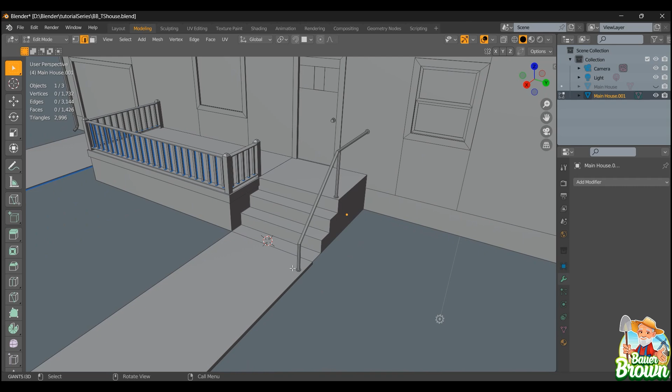Since the last video, I added a few things. I added these little flanges, you can call them, on the bottom of the railing. I put those there, this one and this one. This one was already there. I added an additional gutter in the back here, and a rain spout. So that's been added, and that is about it.

Let me see here. Did I do it or not? I did. On the tops and bottoms of these posts here, on every one of these posts, there's a face. There's a visible face.

So what I did is I went through here and I grabbed the tops of these, each one of these tops like that, and I deleted the faces. Now, the reason that I do that, it's not such a big deal. I mean, it can't be seen, first of all, but that's most of the reason that I did it. One, it can't be seen, so why do you want to put a texture on something that you can't see to begin with?

And the second issue that it may cause is there's a lot of them, right? So with all of these additional faces that you have here, and there's a lot, when you add them all up, there's a bunch. That all gets put into your UV map. So when we look at our UV map over here, which is looking kind of crazy, all those little squares there are going to show up. They're going to take space, basically.

They're going to take up space in our UV map, which we don't want to do. We want to keep that down to a minimum. The less objects that we have to put into our map, into our UV space, the better off we're going to be. So why bother taking up all that extra room? It does add up. All those little pieces add up to a chunk of space that could be used for something that's actually visible.

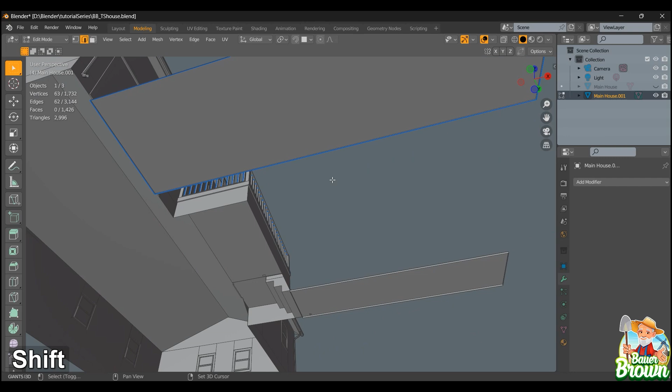And this is what I was explaining to you one other time about the underside of the roof. When you look at the bottom side of this roof, if you did it differently, you see with mine, when I go into face select here, just the visible part has two sides to the roof. We have the top and then we have this part here. Now the underside, that's not actually visible. This is just the back half, right, so you can see it's all in red.

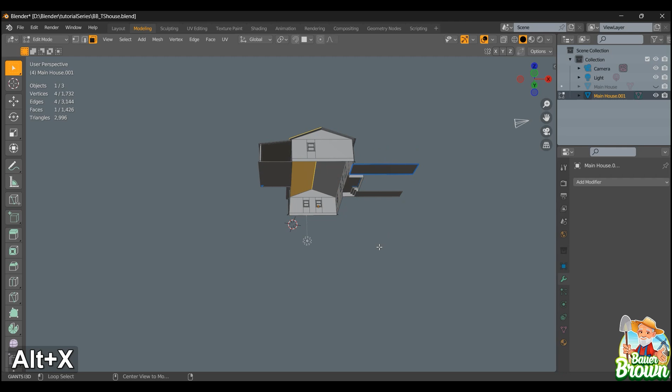So now, like I was saying, if you did yours not incorrectly, but if you did it in such a way that the bottom of your roof also has a face, all of this extra room is going to be taken up inside of your UV map, which you don't want. It's just extra space, wasted space.

And think about it this way. If I had built a huge mansion, and there's just lots and lots of parts to it, all of those parts end up in my UV map. Now this UV map for this is only going to be a 2048 by 2048. That's my ultimate final texture size, a 2K 2048.

Now, if this was a huge mansion with tons of pieces, squeezing them down into a 2048 may be doable. But if I have too much going on inside of there, it's going to make my final texture result look really bad. So in that case, I'd probably just use a bigger texture, like a 4K 4096. But for this house, it's going to be a 2K 2048.

The less objects I have inside of this UV space, the better off my texture is going to look. So if this roof, for example, covers a pretty large area, that's going to be a pretty detailed roof. It won't look bad. But if I squeeze it down so it's only as big as you see here, it may not look as good. It starts to lose a little bit of resolution, that crispness that makes it look like a crisp, clear image. It starts to get a little fuzzy and the resolution doesn't look so great.

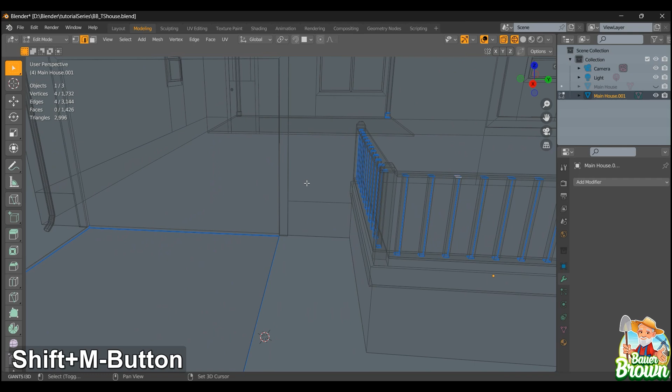Now you don't have to go crazy and delete absolutely every single thing that's not visible. If it's only just a piece here and there, no big deal, as long as it's a small piece. So I'll do the bottoms of these doorways, the bottom of the trim, any one of these bigger posts - I'll delete the bottoms of those. These little railing posts, I'll delete the tops and the bottoms. Probably the same thing for the garage door - I think I'll do the bottoms down in here. I'll delete those.

And I'll just go around and pick the obvious ones. Don't get crazy, don't go buck nutty on this thing deleting every single little thing that's hidden - just the obvious ones, things that are clearly going to take up extra space on your UV map more than you wanted. Go ahead and delete them. So that's one of the things I did while we were gone.

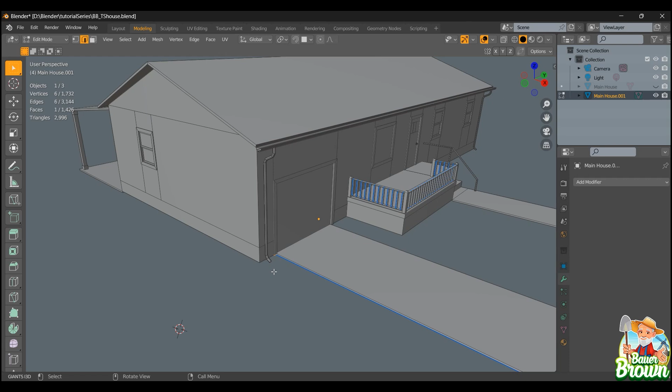Now, the next step - we're going to be kind of skipping a step here. I should have done it already, but this video is about my workflow for this Deco house, and normally it's 50-50. I'm pretty bad at this, but what I'll do is my occluder mesh, right? That should have been done by now, at the very early stages of this house.

The reason I skipped it is because I use a separate program. The same people that make Instamat also make a program called InstaLOD, which also does your occluder meshes, and it does a really, really good job of it. For me personally, it's been hit and miss - sometimes it's outstanding, sometimes not so much - but it's not the program's fault. The program does exactly what it should be doing. It's me that doesn't really know how to work the program that well. I'm fairly new to it, so I'm still navigating the waters a bit and getting used to how things work, but I do like to try to give it a shot.

Now, the fact that I missed making the occluder mesh to this point isn't a big deal, because the occluder mesh is nothing but bringing in a new object.

You would just bring in a normal square or cube and stretch it out to the basic size of the house, make it a tiny bit smaller so it fits inside just the shape. You don't want any of the extra stuff. You don't need the driveway, you don't need the porch. Well, maybe part of the porch, like the bigger base, if you wanted to, but again it's completely not necessary. Just what you see on the house here.

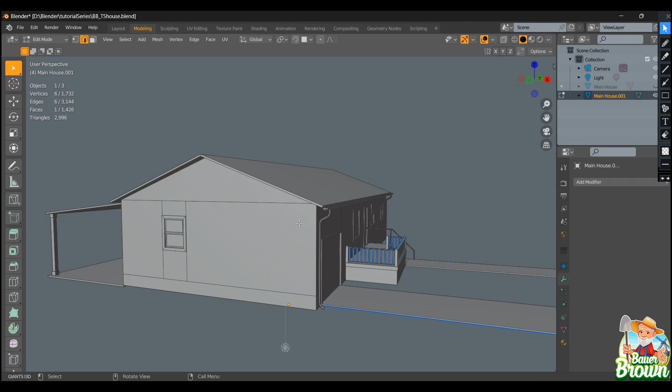And at that point I would just duplicate it, make a copy of it. I call that my occluder mesh. And then that's it, I would just move on to continuing the work with the house. But like I said, I didn't do that step. One, I guess I sort of forgot, and two, I forgot because I'm so used to using another program, but that's fine.

So if when I get to that point where I get to the program, if it doesn't do exactly what I want it to do, I'll show you how to go back and make the occluder mesh for this house. Not a big deal, not missing much, right? It's very, very simple.

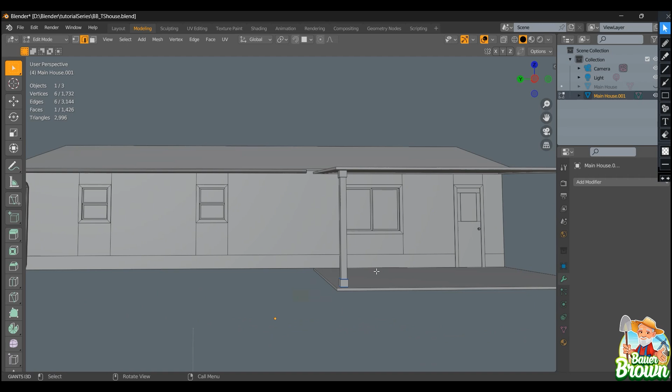Okay, so with that aside, the very next step I would do from here is cleaning up my mesh. Now this mesh here is already, one, pretty clean to begin with, and two, I have done some work on it. Like I said, this is the third time I'm shooting this video, so there's been some work done. And once it's saved, it's saved, I can't go back and put that work back into it.

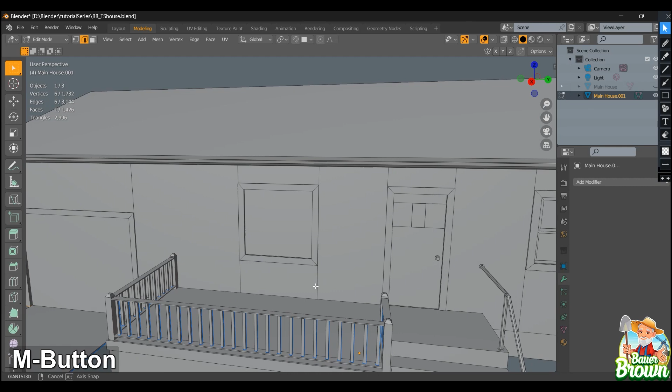All right, so I'm going to try to walk you through this. I guess I could use a different mesh, a different project as an example, but this is so cut and dry and fairly easy that I'm pretty sure you guys are going to grasp the concept either way.

So what I mean about cleaning up the mesh is getting rid of any extra faces, vertices, and edges that are either adding to the geometry or aren't necessary. When you start putting in loop cuts and stuff like that, you end up with a lot of additional lines or edges that just aren't needed, so you can go ahead and start getting rid of them. Now you've got to be careful.

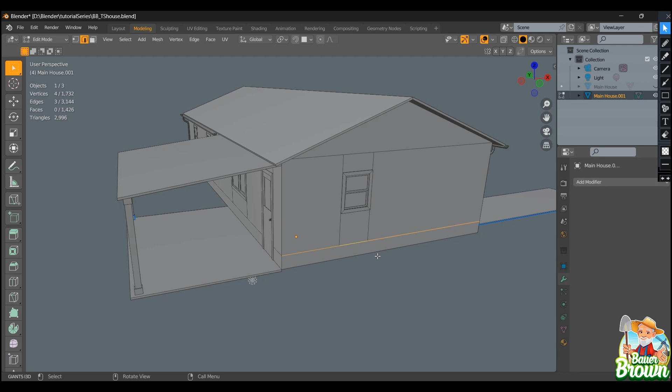Like when you get down here to the bottom, I've already deleted some lines, or edges. You have to give some forethought to what textures are going where, and how you're going to go about unwrapping this house, which is the next step after this. There's going to be a foundation that goes down here, so my texture is going to be like a concrete type texture. So I want to make sure I don't delete this edge because it's needed.

But other edges, like around the windows, if you have extra ones that shoot horizontally, maybe from the bottom of the window out to the edge of the house, that can go. It's just a matter of highlighting it, right click, D for dissolve, and then there you go. Now, with this, you can see it was okay.

It didn't disturb anything, right? So the window looks okay. It's all intact. The house is intact. So why not do that?

Well, the reason you don't want to do that is because you still want to keep your basic polygon, right? So either your tris, which is a triangle with 3 sides, or your quads, which is what you see here, just a regular square with 4 sides. But what I ended up with when I deleted this was an n-gon, right? So that would be something with more than 4 sides.

And what'll happen there is it may have some problems triangulating. Not the end of the world, but you really want to avoid it if at all possible. It may be a problem, may not be. And that problem really isn't going to show itself until you get to the point where you're texturing, right? So when you start texturing, that's when you're going to find out if this caused a problem or not. And it's a pain in the butt, right? You really don't want to have to fix this. Not horrible. It is fixable, but avoid it at all costs.

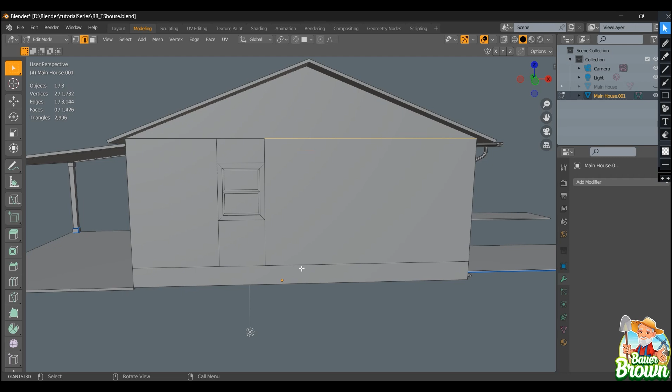Now, to give you an example of this, right? So if I go into face select, if you look at the bottom of my foundation right here, at the very bottom, I want you to focus on this area here. My foundation. If you look at the dot, there's a dot right here. Okay, well, that dot is my normal.

Now, I'm not an expert on this, but I believe when it triangulates and it figures out the area for your texture, it'll do something like this. It'll start at the normal, so it goes from like the corner to the normal, maybe over to this corner. Now, like I said, I'm not an expert, so I might be completely wrong, but I'm pretty sure it has something to do with this.

Well, with this normal being too high up, it's much higher than it should be. So that normal should be, it's not much higher, but it should be sitting a little bit lower. It should be sitting right about this area.

Now, the reason this happened is because I deleted additional edges that I didn't need. So I had some vertical edges. Let me go into my knife tool here. We'll stay in face select. So I had some additional vertical edges in here.

Now, when I add that edge, now you can see look at these two normals compared to each other, right? So this one here is right smack dab in the middle where it belongs, which makes triangulation very easy, much easier than this one. If I was going to have a problem with either one of these, it's going to be this one here, okay? And that's part of how it's fixed.

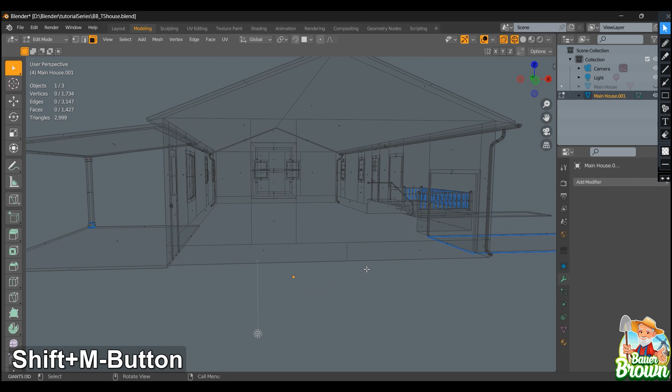When you get into Substance Painter and things aren't quite going the way you want them to with the textures, and what'll happen is it won't apply a texture, it'll look white. I'll show you. It happens frequently. I don't know if it's something I'm doing wrong or anyhow.

What I'll do to fix it is I will add these extra edges in here. Like you can see what I'm doing here is just going vertically, sticking an edge in there. Okay, so now this one here looks good. This one here looks good. In the middle is still a little bit but it may or may not give you an issue.

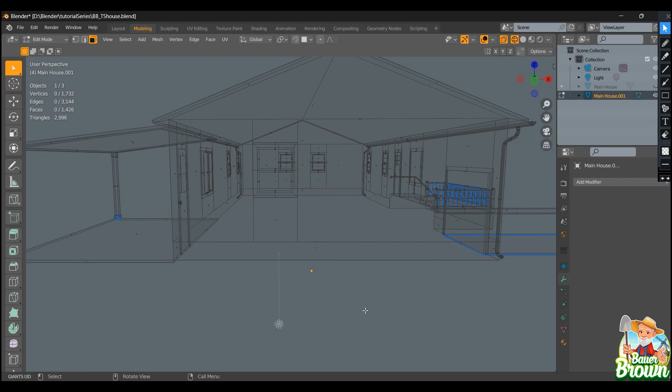So point being there is as you're deleting extra edges, just be mindful of that. Now you don't have to be scared to delete certain things because you may end up with a problem. It still looks nice. I still have a nice quad down there that I can work with. And generally it goes okay, right? It's hit and miss when it actually causes a real problem for me. And it's like I said, it's not the end of the world. It can be fixed. I don't want to say simply enough, but it's not difficult, right?

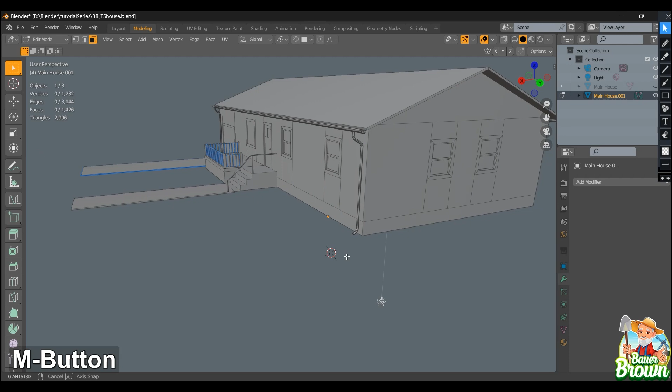Just be mindful of the edges that you delete, because if you get a little too crazy with it, you can throw off the overall position of your normal. Now, I know you can recalculate normals, but I don't think it calculates it back into the center of the face itself. Maybe you can, but I'm not sure how that's done. I've looked into it and didn't find an answer, so I'm not quite sure that's something that can be done, but maybe.

So like I said, that's what I'm doing here - going through any stray lines, which are usually just leftover loop cuts, and getting rid of those edges.

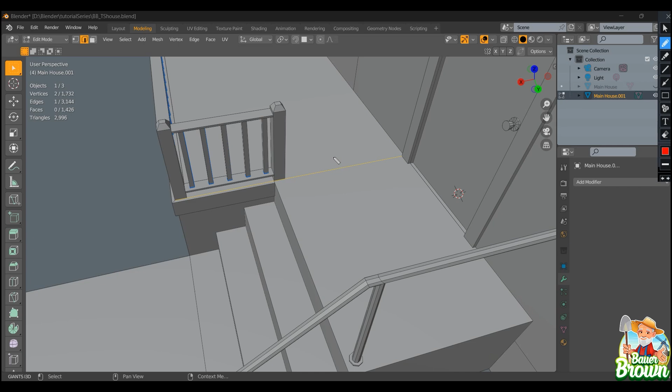Even on this porch, I would leave this edge here because it's an edge for the top of this board runner thing, and it's also the corner of the porch. But if it was just a single line - meaning a line that stopped right here, only about that long - I would probably still leave it, because if I deleted it, it would create an n-gon. I'd have 1, 2, 3, 4, 5 - 6 sides to this polygon now, and you don't want to do that. You want to try, when at all possible, to keep everything as tris and quads.

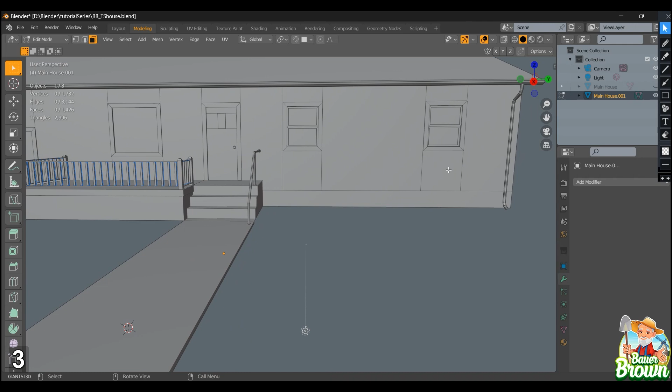That's why my windows look the way they do. I got rid of all my horizontal lines and left these 4-sided polys here. I left these quads in place because they're easy to texture, they're not going to cause a lot of problems, and it's adding very little extra geometry.

So like I said, the name of the game here is to keep your geometry as low as you can. Now does it matter? I get this question a lot - between vertices, edges, faces, triangles, which one matters, which one do I look at? Well, they're all basically adding up to the same thing. If you think about it, an edge is created between 2 vertices - when you connect 2 vertices, then you have an edge.

When you take 3 to 4 vertices and connect those, then you have a face. Same thing with a triangle - 3 vertices is a triangle. So it all comes down to your vertices. Ultimately that's the number I look at - the vertice count. Some people look at the triangles. Ultimately there's not a huge difference - just pick one of these numbers and stick with it. Just make that number go as low as you can and you'll be in good shape.

I look at vertices. I'm going to keep that count down as low as I can - depending on your model, it can get a bit up on the higher side. It's not a huge problem unless you're really high, like when you start getting into the 100,000s, or even something like this house - if this house hit, let's say, 10,000 vertices, maybe 10,000 isn't horrible, but any higher than that I'd be thinking I got a little too much into this house. And 10,000 for me is still pretty high.

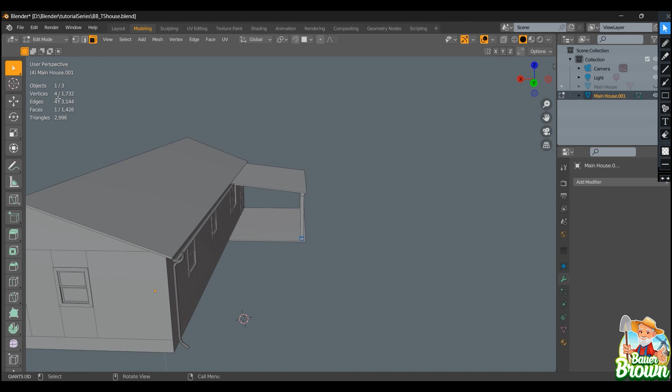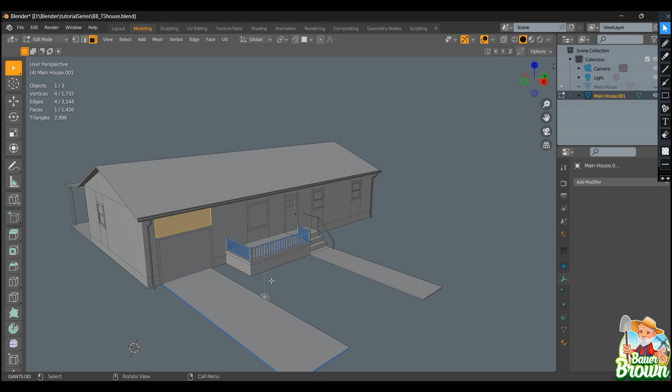As you can see, I'm pretty much done, and I'm only at 1,700 vertices. But I have done projects where the vertice count has gotten up pretty high. You can go look at some of the models currently in Giants Editor - the base game models - and see what their counts look like. They're much higher than anything I'm putting into the game, so you can relax a little bit when your poly count gets a bit higher. But like I said, you do want to keep it on the low side.

So like I said, go through any extra faces - the bottoms of your porches, the bottoms of your posts, the bottoms of your roofs - anything that needs to be deleted that you don't want to show up inside of your UV space. You want to go ahead and delete that.

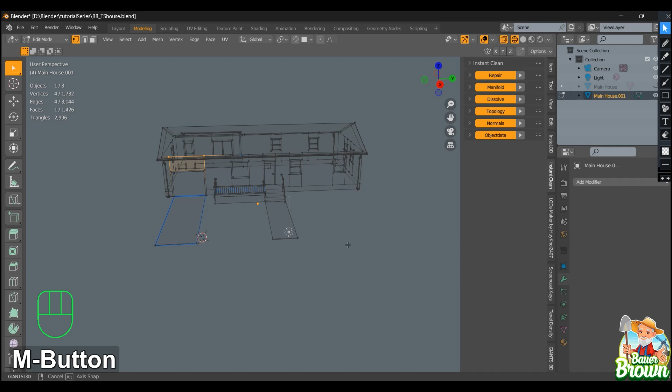Now, one of the things it does that you can do on your own without spending a whole ton of time, and I recommend you do this for every one of your projects, is go into your vertices select. It doesn't matter if you're in X-ray mode or just in solid mode, but what you want to do is hit A for all, select all of them.

And then you want to hit M for merge, and then B for by distance—merge by distance. Down at the bottom it'll tell you how many vertices were removed. Now, I've already cleaned this mesh, so it only removed one vertice. But in your case, it can remove several hundred depending on what you have going on.

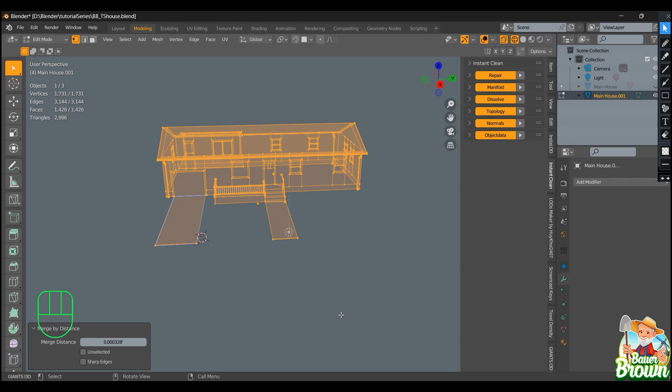So if for some reason you have a lot of doubles, I get them too, lots of doubles, so don't think it's necessarily something you're doing wrong. Maybe it's something you could be doing differently. But as your skills progress, you'll do it less and less. My meshes now, compared to when I started out, are much, much cleaner.

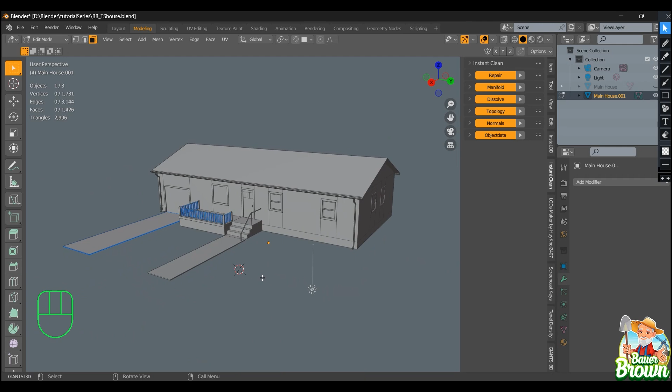They were a mess, man. When I first got into Blender, I'm like, holy hell, this thing is just horrible. So they have gotten better, but that's one thing you can do that's going to make a difference, right?

It'll get rid of a lot of those double vertices, double edges, double faces that you can't see with the naked eye. You didn't know it was there, and there's a lot of them—a lot that I don't know exist, and I don't know where to look for them because I don't know they're there. So that's a huge help all in itself.

So like I said, highlight all of your vertices, go into vertices select, A for select all, and then merge by distance. That'll help you out a lot when it comes to cleaning your mesh.

Okay, so the add-on I use—this is going to be completely up to you whether or not you want to use an add-on. This one is not free. Some of them are not, but this one can be found over on Blender Market.

So it can be found on Blender Market. If you go over to Blender Market and just type in Instant Clean in the search box, it'll bring up something that looks like this. It goes for $9.99, about $10, and it has a video demo. I'm not really going to get into it, but they do have other products as well.

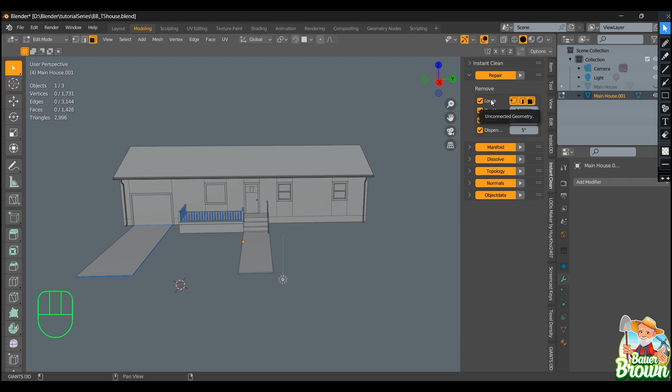Instant Clean, Section Box, stuff like that. But anyhow, long story short, it basically cleans your mesh for you. Now I'll walk you through it quickly, but I don't want to spend too much time on what Instant Clean does. You can drop down each one of these little arrows here, hover over it, and it'll tell you what it's fixing and what it's not fixing—unconnected geometry, doubles, zero faces, and on and on.

Now, the one thing to keep in mind, if you look over here on my scene collection, you see I have main house and then main house.001. I have a copy, and right now I'm currently working on the copy. The main reason I have this copy is for Instant Clean. So before you get all crazy with this program or add-on, make a copy of your house.

Because the very first thing that I did when I got it, I just hit repair. So if I have my object selected, like main house here, I hit repair. Well, nothing came up in this, but generally it will. There'll be a lot of stuff that comes up. And immediately you see these big numbers and you're like, wow, this is great, it's doing such a good job.

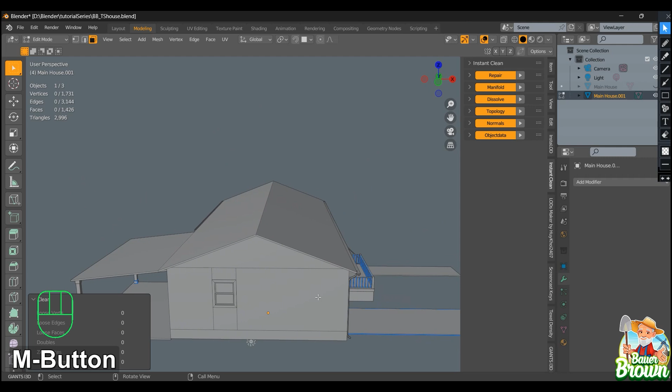And then you'll move down to manifold, dissolve, and you'll keep going and going. You're like, wow, look at all the stuff it took out, this is just an amazing program. And you save it. Maybe a little while later, you come back and realize it took out things you didn't want it to take out. Now your mesh needs to be fixed, first of all, and a lot of times it's maybe not fixable. Maybe there's things it took out that you don't have any clue how to try and fix, and it just made things miserable for you.

So always, before you get into Instant Clean, make a copy of your mesh. This way, if you totally screw the pooch, you can always come back and pick up on the copy that you didn't goof up. So make a copy of it.

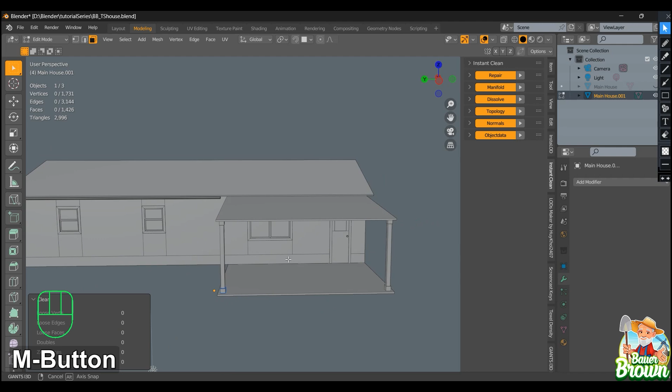And then the second reason that copy is there is for demonstration purposes, because it's the third time I'm shooting this video. It might be the fourth. For some reason I think I shot it three times already, and this is number four. Like I said, I had some issues - one, I had microphone issues. It's been a mess, right? But that's okay, I'm going to make the best out of what I have here.

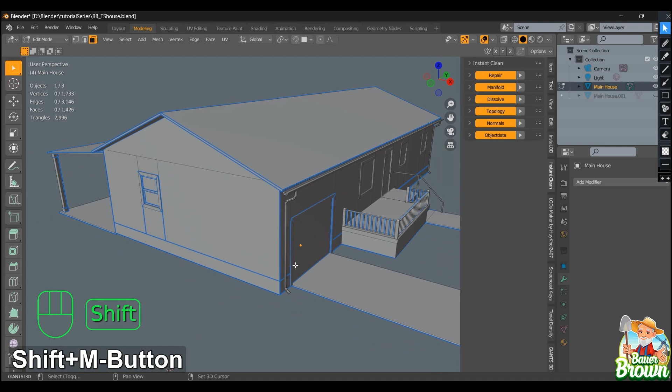So I have a copy that I can use to show you a few things, because my other copy here, you can see there's just a bit more unwrapped on it. And that's what I'm going to show you next, on one that doesn't have as much unwrapping done to it.

So go through Instant Clean, drag down each one of these boxes. Usually repair is pretty good. You can check and uncheck these if you don't want it to do something. So repair in itself is pretty good, you can use that one.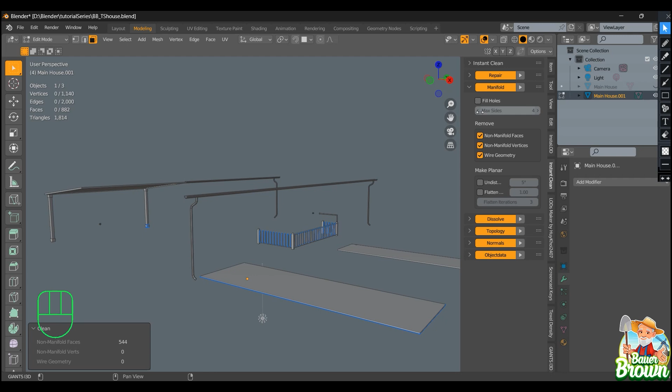Manifold, you want to be careful of. You can see in here, I have non-manifold faces checked, and there's a reason for that. If I go ahead and say okay, clean manifold, well, you can see what it did - that's not good. The reason it did it is because I have the bottom of the house deleted, so that made this whole entire thing here a non-manifold face.

You just want to be careful, because there's a lot of things it will delete that you didn't notice, and you're like, damn it, I didn't notice. I've had it completely delete things like windows or driveways or a porch, and I didn't even notice - a big object that I should have been aware of. So just be very careful of that one. Maybe it's the way I'm modeling, but I generally end up with a good handful of non-manifold faces, so I'll take that out of the selection and then run it.

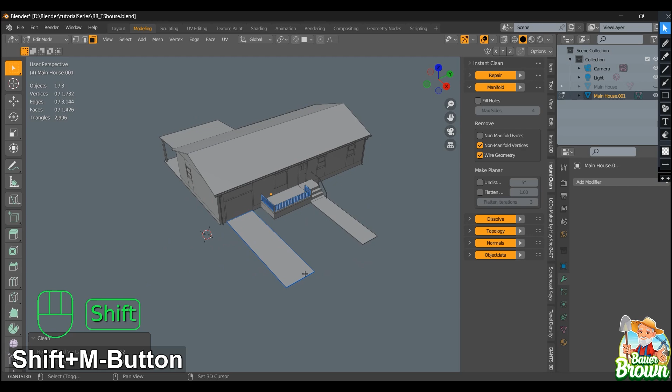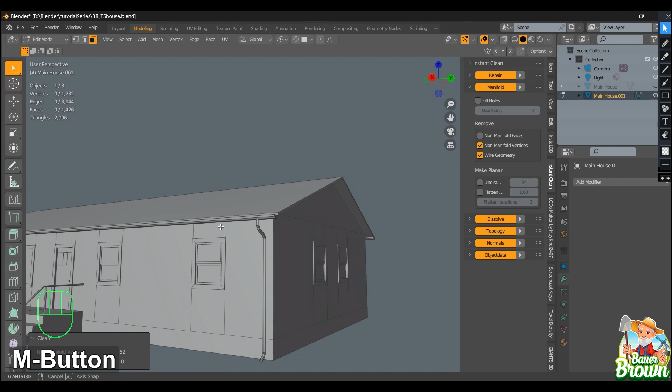And then you can see it took out 52 non-manifold verts. When I go through here, you can't see any significant changes, everything looks the way that it did. Make sure you do this - it's very important that you go through and have a quick peek at everything, make sure it looks just the way it did before you started cleaning. And that looks pretty good - you got rid of an extra 52 vertices that you don't even know what the hell they were doing. So that's manifold.

Dissolve is one that I don't use at all. It's not that I don't go in here and check and uncheck certain things, but I don't use it at all. So with dissolve, you can see if I was to use that.

It did a decent job, but I end up with a ton of n-gons. It got rid of the edges I need for my foundation. So I don't even bother with dissolve. Anything I want gone, I'll take out by hand. Normally, dissolve is better for a much bigger mesh that's got a crazy amount of detail in it. That's basically where you'd start using tools like that.

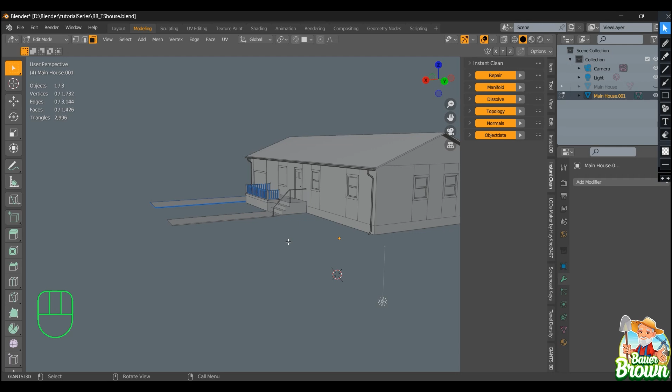With something like our little house here, it's much more manageable to go through and do these things by hand. And then object data, that's if you have any extra materials in your list that aren't associated with anything in your model, it'll just delete them because they're not needed. So just keep that in mind.

Instant Clean, if you want to try it out, is $10. I use it faithfully, every project I use Instant Clean. It helps out a lot. But again, if you don't have the $10, or you're not sure if you want to put that kind of money into an add-on this early on, it's not a problem, don't worry about it.

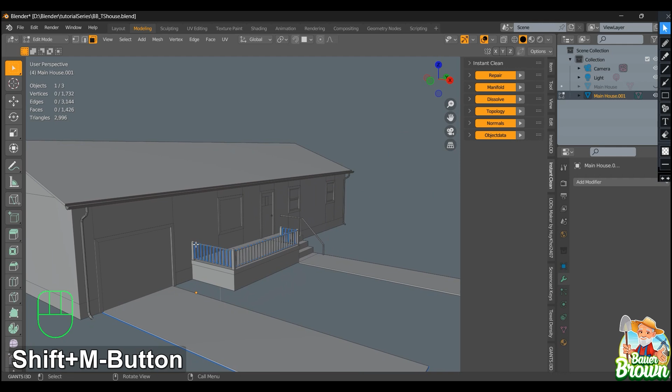Don't be like me, I get a little out of hand with things, a little bit crazy. I've got quite a bit of money tied up in add-ons, which I can't say if it's a good thing or a bad thing. Some add-ons, like Instant Clean, are well worth the money. Others I spent a good chunk of money on and rarely use. So you take the good with the bad, I guess.

Okay, so that was step number 2 in this house, just cleaning up our mesh, and we're prepping it for the next step, which is UV unwrapping.

Now, UV unwrapping—I feel like in the video I did as part of the Blender tutorial series, I didn't do the greatest job explaining unwrapping. It really depends on how you plan on texturing your model. If you plan on utilizing the Giants textures, you don't have to unwrap at all. You just go through and select your faces, like I showed in a video. You don't need to unwrap anything if that's how you're doing it—it's a very simple process.

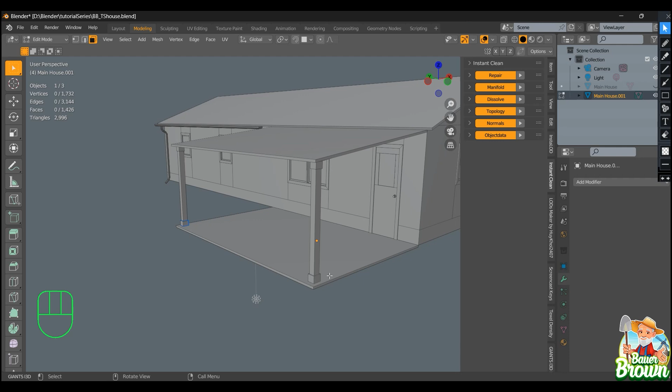Now, if you're going to export into a program like Substance Painter or Instamat or something like that, the unwrapping part is critical. You need to do a good job with your mesh, and then secondly, a very good job unwrapping, so things look good in your UV space.

Now I'm going to show you how I set up my UV space quickly. I go into UV editing first, then I go over to UV here, click on that, scroll down to Live Unwrap, and check that. Then head over to the right-hand window, go to options, and check Live Unwrap there too, so each window has Live Unwrap going.

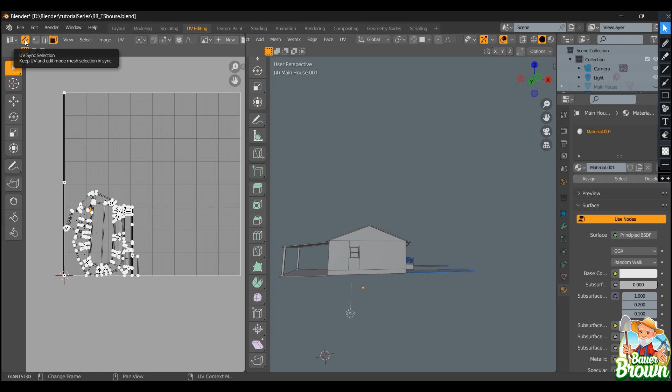And then up here, this little double arrow—when I hover over it, it says UV Sync Selection. Make sure that's turned on. So what it's doing now is every time I make a change to my mesh, it's showing you these changes in real time.

So if I was to mark that, you can see something right down in here disappeared, right? And as I mark each one of these, it will update in real time. See how my mesh is starting to take shape here?

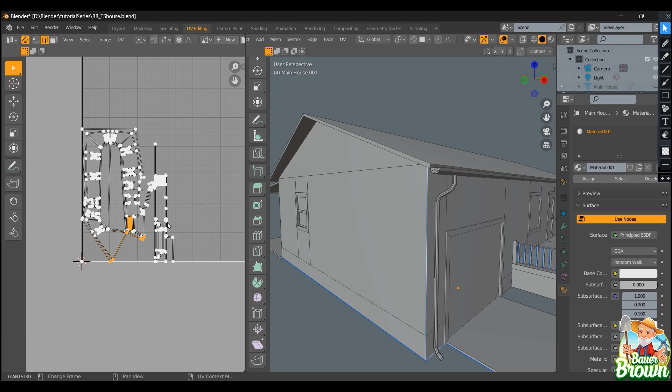Now what I'll do is I'll go through and set that up initially. I don't really pay much attention to it after that, I get it set up, and I no longer keep this window open because it's constantly going to make changes. It's going to have its uses a little later on, but right now we're not really going to worry about what's going on inside of this window over here. Things are starting to take shape, but we're not going to worry about that right now. What we're going to worry about is we're going to stay in our modeling window. Like I said, keep it set up because it's going to be useful down the road, but right now we're not going to worry about it.

So what I explained in my part of my Blender series with UV unwrapping—now I should have the square set up to show you with the cube. I'm sure most of you guys have an idea of what unwrapping is and what it does, but let me give you just a quick breakdown.

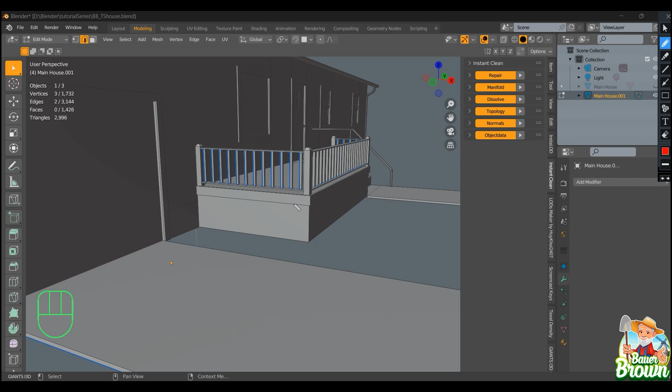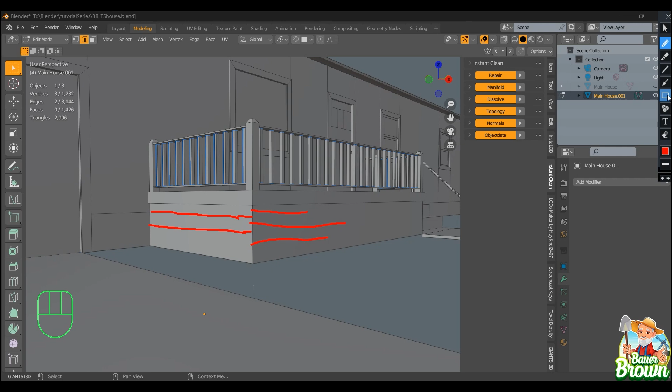So if you take this porch that I have here, if I was to put, say, a brickwork on it, the bricks have vertical lines and horizontal lines that, as it went around the corner, it would be easy to tell if your bricks didn't match up. So your horizontal lines would look like this—I know they look like crap, it may not look that great—because anything with a pattern, if it isn't done correctly, if it doesn't line up correctly, it throws the whole thing off.

So depending on what you're doing, you would want this face and this face to act as one. So right here on this corner, think about that like a hinge. Instead of this being two separate pieces inside of your mesh, inside of your UV space you'd have one piece and then another piece, and these two pieces could be anywhere inside of your mesh. So you're getting a piece of the brickwork, maybe from the top of your UV space—I meant, right—this face here could be at the top of your UV space, in the brickwork, and this one could be somewhere towards the bottom. The point is, it's showing you two different things, and you want it to act like one piece instead of two separate pieces.

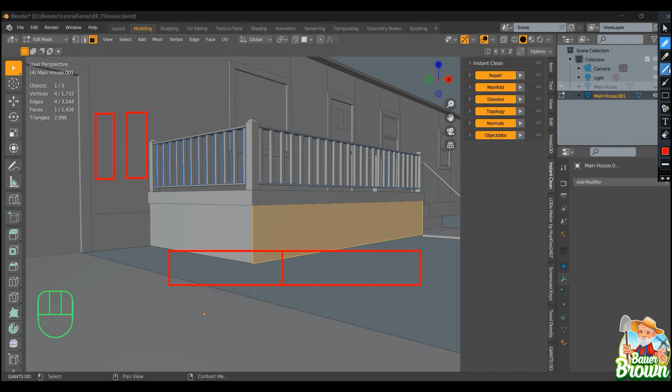So instead of what you have here, you want this face, both of these faces, to look more like a longer piece that actually just has maybe a line—these are actually two faces, something like that. So basically it's like you just unfolded it. You can think about when we mark our seams, what we're doing there is basically like a knife—you can think of it like a knife.

What I'm going to do here—like I said, it's a really hard thing to explain, I really struggle explaining this sometimes—I'm going to look at the bottom of this post here. Now with unwrapping, I'm going to keep myself in edge select, and we're going to unwrap the bottom of this post so it unwraps in one piece. Now, is it completely necessary that it remains in one piece? No, it's not. It's not necessary at all.

But when you start getting into things like wood grains—like if you take this window, for example—this is going to have a wood grain on it if that's the way I choose to do it. You have to have some forethought in your project about what your textures are going to be: are you going to use brick, or some kind of vinyl siding, or concrete? What are the textures, what are you thinking for the trim work?

If it's going to be wood with a visible wood grain, think about the direction it's going in. You wouldn't want this top piece to have the grain going in the same direction, right? That wouldn't look right. You want it to go this way, side to side, because that's the way the wood grain goes. And the same with this, there's a direction you want it to face.

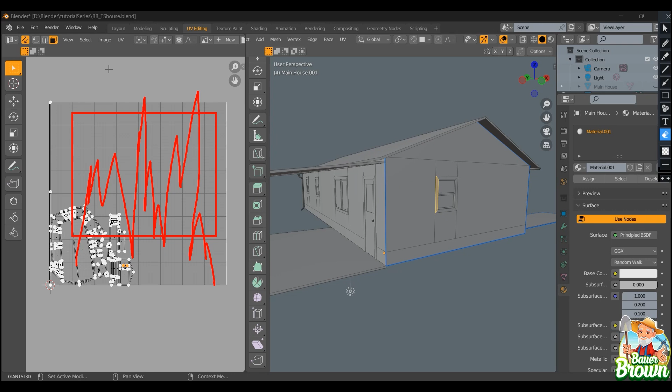You want this horizontal to be flipped 90 degrees. So when you do these separately, when you mark up the seams so they're separate, you have the option of spinning these faces inside your UV space to get them lined up the way you want to reflect the changes you want in the texture. Something like brickwork that has a pattern to it, or wood grain that has a definite pattern, has a direction you want it to go.

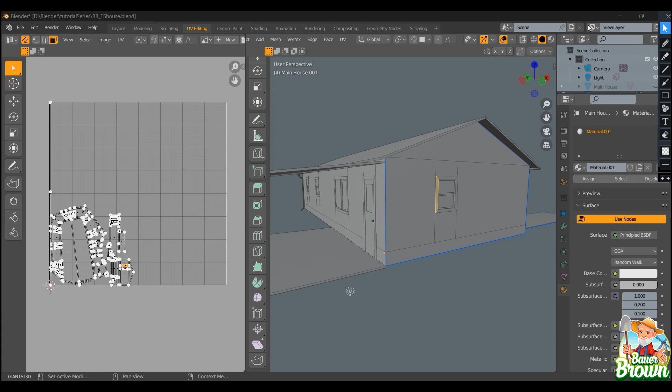So that's what I mean about what needs to get unwrapped and what doesn't. Ultimately it's up to you — not everything needs to be unwrapped. I could technically take this bottom square here, the bottom of this post, and mark every single thing as a seam. But what that's going to do is make everything a separate object inside the UV space.

So this square here will be a separate object, this top here will be separate, this will be separate, this will be separate. And depending on where in that UV space it puts it, it may not look quite right in your finished product — maybe it puts this in a lighter area where the wood grain looks one way, and sticks this in a darker area where it doesn't look so good. So you want to try to keep everything in the same ballpark area.

So that's what we're going to do — unwrap this as one piece, and I'll show you how. Let's get ourselves an edge select, and I'm going to select the entire bottom edge. You can see I have that whole bottom square. Now, it depends on your setup.

Right now I can right click and pick mark as seam. On my home computer I can right click and just hit M, because for some reason I must have a different add-on affecting my menus. But on this one, I guess I don't have whatever that add-on is. The other thing I can do is pick this top square here, and all I'm doing is separating out this bottom piece from everything else.

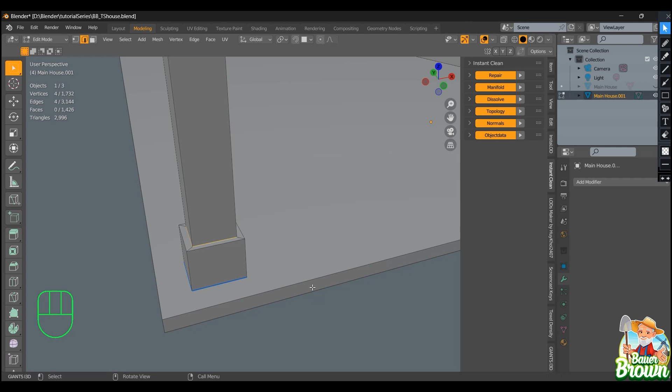So you can actually hit U for unwrap and then M for mark seam. Now from here, what I want to do is pick one corner, right? I'm going to pick one corner of this, like right here, and mark that as a seam.

What's going to happen is you can think about it like this: it'll basically unfold this, like if this was a cardboard box. We're making a cut down the corner of that box so we'll be able to unwrap it and unfold it. These edges here, and here, and here are still going to be connected because we didn't make any cuts there, so you can just sort of unroll it and lay it down flat.

Now there's an additional thing I want to do: go to these little top tabs here. So instead of taking the 4 squares, I'll end up with something that looks like this, where instead of 4 separate squares, it'll look more like this.

Now these top tabs, as I call them, but to me it looks like the top of a cereal box or something. What I'm going to do is mark these edges as well, so I'm making a cut. Now it's still connected right here.

Since this is cut and this is cut, I can kind of stand that up. You can think about it like unfolding it in this direction. So when it's all said and done, I'll have a square - that'll be my square - and at the top of it, since I unfolded it, I'll have something like that. I'm going to do that all the way around the top.

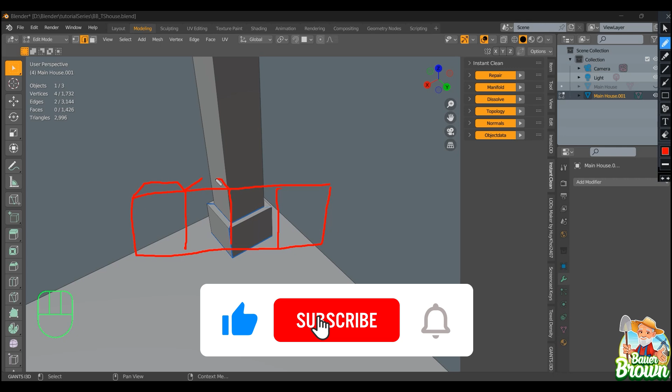Now if I was to take something like this and put that in my UV space, it would look a lot better, because the way it overlays your image, all of my wood grains are going to bleed out of one face into the next face. Same thing with the tops - it'll be a lot more uniform looking than if this was 8 different parts.

These 8 different pieces will be scattered about your UV mesh, and you really don't want that. It's a lot nicer if you can keep it in one area. So I'll show you how to go over to the UV space.

We're going to go into UV editing, and I'm going to pick one of the faces here. Now I'm going to press period on my keypad and zoom in there. So you can see what we have here - this is exactly what I said we'd end up with. We have the square here.

And here's that tab at the top. And then right down the line, here's the next one. But each one of these, you can see I have the same thing over here with the other column - there's the tab, here's each one of the tabs, and here's each one of the faces.

Now, doesn't that look a lot better in one nice unwrapped area than it does if they were just scattered about willy-nilly, right?

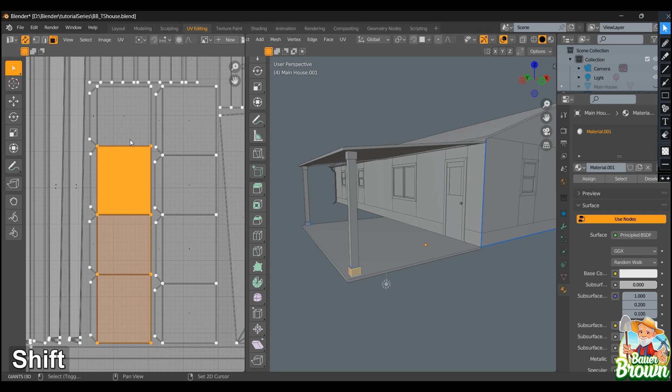And I can control the direction of this. If I want the grain to be a certain way, I can flip these. I can pick all these. They call this an island, right? So this here is one island because they're all connected. And you can see by zooming in on it that it's not connected to anything else. That's because of where I mark my seams. I cut it, I separated it from the rest of the mesh, so it's an island by itself on my UV space.

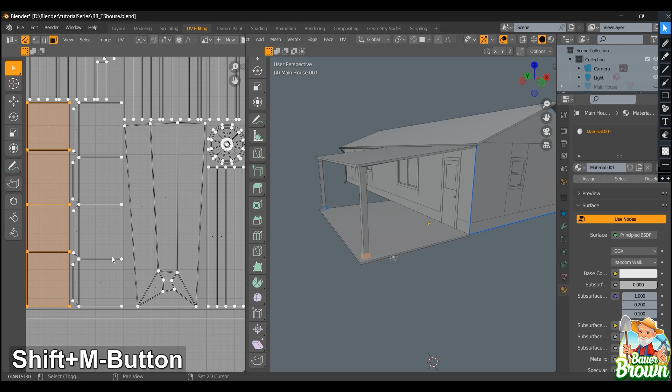Now in our UV space, what we're trying to do ultimately is have things be more square, straight and square is what we're looking for. You can see over here, I'll give you an example. Like if you look at all this, it's nice and orderly. This is all pretty nice, right? You can see I got 1, 2, 3. Looks like 4 sides that make up each island. Any guesses as to what that could be?

Well, you remember when I told you to make sure you mark the seams on your railing posts ahead of time? This is why. This is just by marking them the way that we did, this is how it unwrapped, nice and straight and square, because that's what we're looking for. We're trying to get something that's more along the lines of looking like this than it is, looking like this. This is very, very bad, right? We don't want to do this.

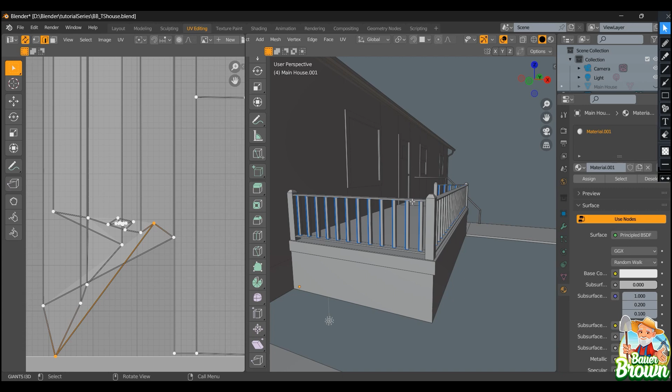And keeping it in live unwrap, when we're finally done marking all our seams, I'll be able to come back here and look at my mesh. And when I see something like this, I'd be like, all right, something's not right there. I can go into edge select, highlight the seam, hover back over my main window, press my period key, and I can see what edge that is. I'm like, okay, well, maybe I need to mark that edge because that's not looking too good. So that's why I use live unwrap. Basically what I'll be able to do is mark it right there on the spot and see the changes in real time on whether or not that made a difference.

If it didn't make a difference, then maybe I'll unmark that edge and go pick a different edge. Like maybe this edge needs to be marked, or maybe this edge needs to be marked. It all depends. So live unwrap definitely has its uses.

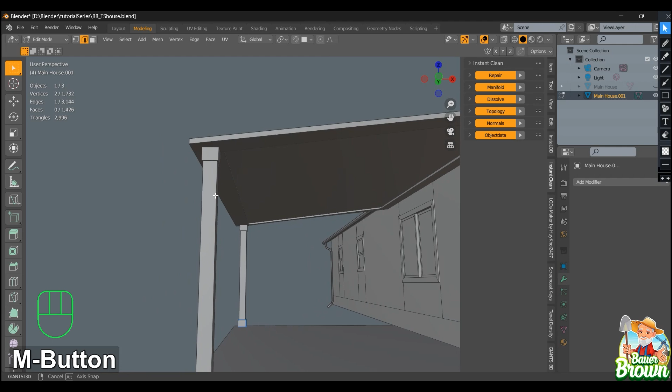So now with the post here, I would do the same thing for the top of the post that I did for the bottom. Sometimes it's easy if you just go into X-ray mode, and then just pick everything like that. I'm just separating this from the rest of the mesh. It doesn't matter when you pick that one vertical to make your cut. Now I'm calling it making a cut, but you're just marking a seam. But you can visualize it like you're cutting it.

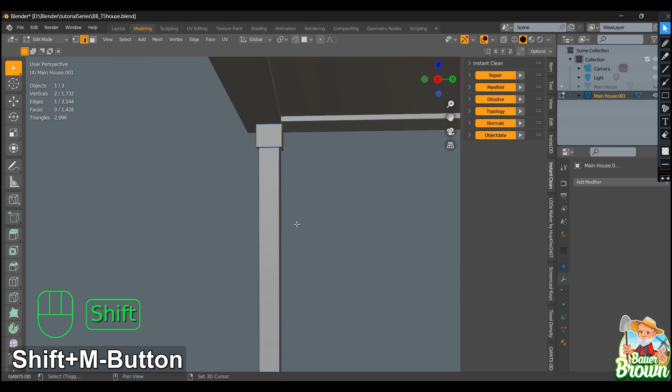You want to put that in a spot that's not as visible. So if I was looking at this from the back of the house, I would pick one of the back seams, that's not visible. It's hidden on the back side of this post. Of course, you'll be able to see it from this side, but six of one, half dozen of the other. When possible, you want to try and hide your seams, because this is going to be where two different parts of your image come together, and they may not match up perfectly, but that's okay.

So like I said, oops, I didn't want to do that. I'm going to hit shift to be able to select multiples, and then I'm just going to pick those. Now, like I said, I didn't automatically go into this knowing what needed to be marked as a seam, what didn't need to be marked as a seam. It took a little bit of practice, a little bit of trial and error, and having that UV space open so you can look at the changes in real time helps with that.

It definitely helps to see what's going on inside of a UV space. But little by little, I got used to the way things look when they're unwrapped. It all has to do with visualizing that 3D object, and what it would look like if you were to slice it and unfold it like a cardboard box. You can think about it that way.

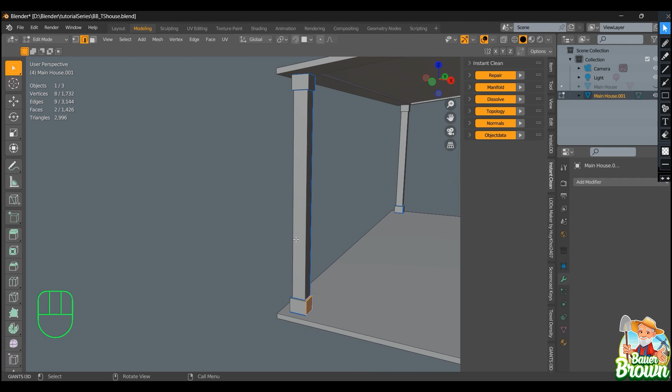I would do the same thing here with this post. I'd grab just this seam here, and then mark that. So this is actually unwrapping into three different objects, right? We have three sections: this middle section, the top, and the bottom. So that's three separate spots in our UV space.

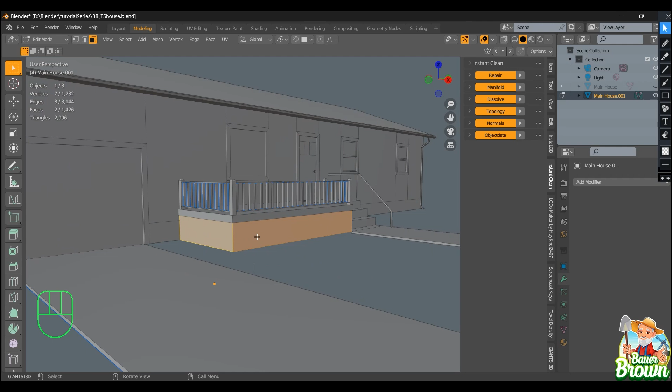There may be a way to unwrap this whole thing as one piece, but it's not really necessary. Now, what I was explaining earlier, like with this porch, you can take it all as one piece if you wanted it to be brickwork, say, and you'd want these to be one piece, so you would not mark a seam there. You would skip that part, and it would unwrap as one piece. But you need to pick and choose when you want to do this.

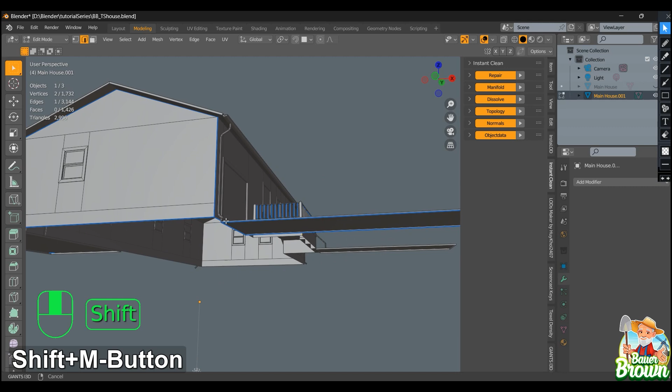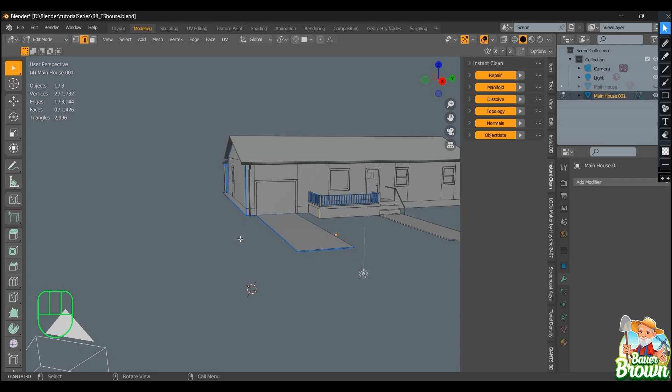But I'm going into Substance Painter with this, and my images aren't going to tile like that. I only have a very limited space to work with, which is that 2048 by 2048. I'm going to take up as much of the space as I can, but not so much that it's shrinking it down, you follow what I'm saying? If I was to unwrap this whole house in just one piece, all four sides in one piece, it would squeeze it down to fit inside my 2048 by 2048. But the operative word is it's squeezing it down, and I'm losing some resolution when it does that.

So maybe I would do two sides, but generally not. I generally keep it unwrapped with all four sides separately, because this way I can always line them up inside of whatever program I'm using, which would be Substance Painter.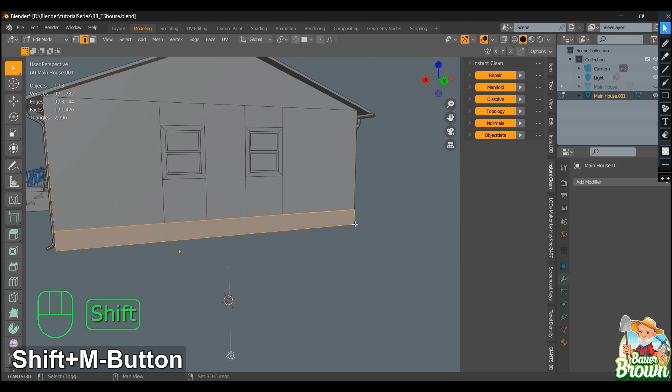And then I would go through and pick anything that I know is getting separated from the mesh. Now you can see what I did here is I highlighted this, the bottom of my foundation. The reason for that is because I want this piece to be separate. This texture is going to be different than what's up here. Up here is going to be some sort of vinyl siding or wooden siding, but down here it's concrete. So I don't want these to be one piece. I want them to be two separate pieces so I can do something different with them in two different areas of my UV space. That's why I marked that seam.

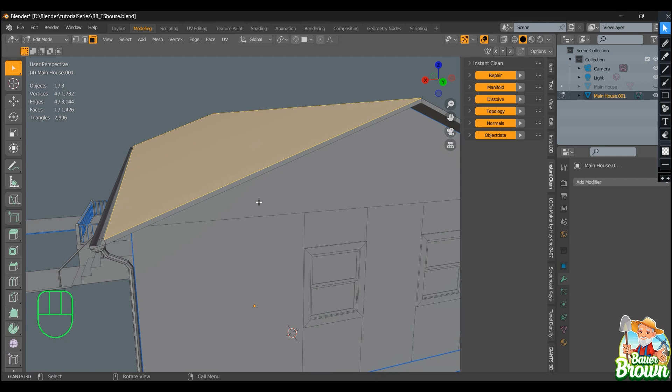And then I would just go through and mark out the rest of the house here. Now you need to keep in mind certain things, like this roof. The top of the roof I'm going to want to be like a shingle, some kind of asphalt shingles. The bottom side, maybe some kind of vinyl or wood. And the same thing with this side here, it's either going to be wood or vinyl. Since I know this texture up here is going to be different from whatever textures I'm using here, I automatically know that I'm going to want a seam here.

Now, an easy way to do this would be just to hit that whole face, hit U and M, and you've marked all four of your seams as one.

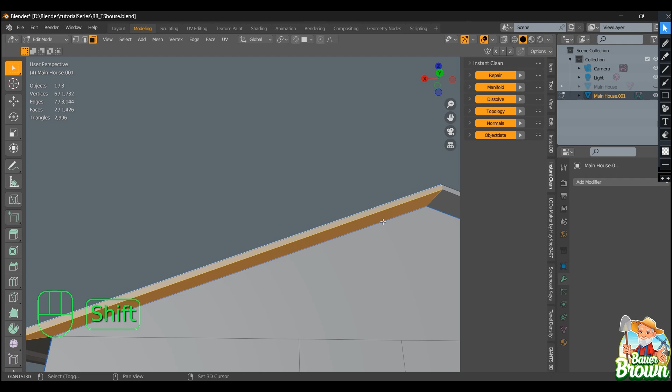Now, let's say I'm going to use a wood material here, but I want this to be the same type of wood, so it just looks like one piece. I would skip putting a seam right here because that would make a cut. Instead, I'd leave it like this, and mark that right here. So I left this seam go, and that's going to wrap my texture right around, treating this like one big board.

But if I wanted wood under here, and then some kind of vinyl flashing here, then I would mark that seam, and I'd have three different areas. So basically you're just thinking of what textures you want to use where. There's some thought that needs to go into that.

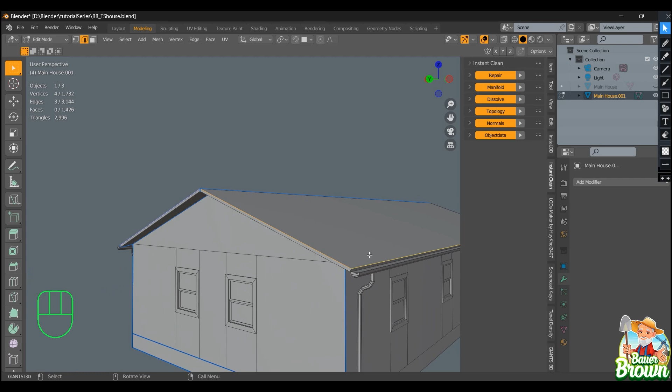I would just mark up the rest of my edges like so, same thing with the windows. When I get over here to the windows, I'm going to mark the edges. Going in and out of X-ray helps to make sure you got everything, because I want to separate this window from everything else. So I'm going to mark that.

And then I'm going to go through and grab all these corners, because the corners are what's going to separate these four pieces, the 1, 2, 3, and 4 pieces. That's going to help me separate those.

Now what I'm going to do is go into face select, grab the windows, and mark those. Then I'm going to come back and grab these edges here, and mark those.

Now with these here, you can see this line and this line. I have these because the trim, that's generally where all the thicker trim is. So this texture inside here would be something different - either bare wood while the outside was white trim, or sometimes I'll go through, grab this line, and dissolve it, treating this as one big piece. So this will be all white.

Now, because it's all one piece, I want this outside edge here, this edge here, and this to all act as one piece. So that's all going to unwrap as one piece.

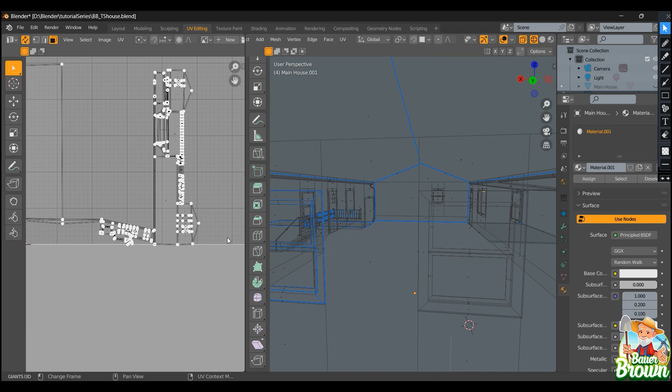So if we go back over here, we'll pick a window - let's get into face select just so I can pick something here, and we'll find it on our mesh. Now, this is what a window looks like before it's been UV unwrapped. Yeah, doesn't look so great.

And that is our window, or that's a window I should say, over here. Let me pick one over here instead. So that's the exact window next to the one we were just working on. Still doesn't look that great, it's a little bit wonky.

You got to keep in mind that when your faces are out of whack, if they're crooked or wavy, that's going to reflect in your finished product. Your textures are also going to look wavy and crooked. So that's why everything wants to be square and straight is ultimately what you're shooting for.

So if we pick the window that we just unwrapped, now you can see it's all in pieces. That's my side piece here, that's a piece of my trim, and you can see how it unwrapped as one piece. If we zoom in a little bit, this is the outside edge, the piece that faces outside, and here's our inner piece. So it's unwrapped all as one piece and it looks nice, all nice and square. So if we were to overlay a wood grain, it would all be heading in the same direction.

Now this top one here that runs horizontally, that's probably not the way I would want that to go. I would probably flip this 90 degrees. When I'm all done cutting up my house, you can manipulate your UV space. So I hit R for rotate and then 90 for 90 degrees. And when I pack my mesh, that'll pack that in really nicely in the direction that I want it to face. Actually, no, that would be correct the way that it was.

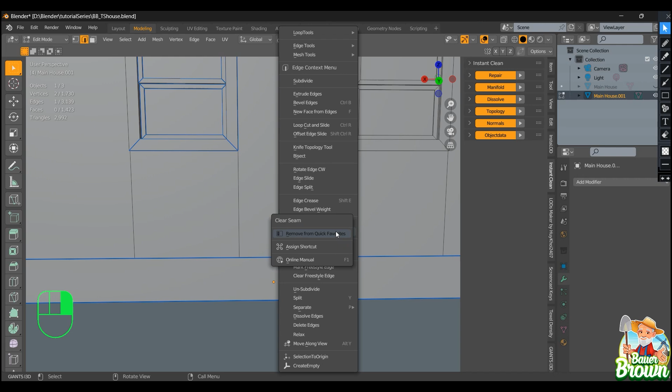But what you could do is just assign that to your quick shortcuts. So you go to clear seam, right click, and add to quick favorites - I already have it added. So if this was already marked and I decide I don't want that, I can just hit Q and then C, and that's it.

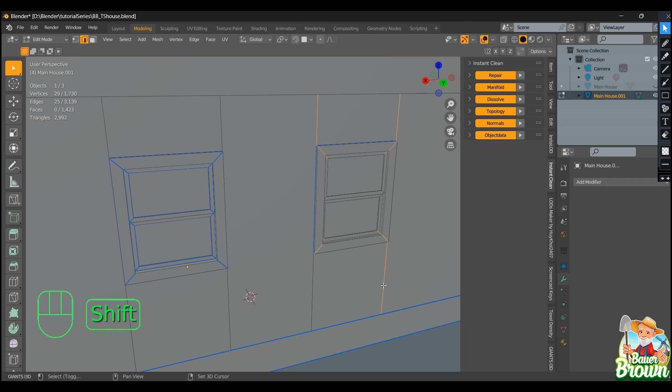I cleared the seam. So utilizing your shortcuts is definitely going to come in handy for you guys. And then, like I said, repetition - once you get used to what needs to be unwrapped, or when I say unwrap, what needs to be marked as a seam is what I'm talking about, what you have to mark and what you don't have to mark to get the look that you want.

That repetition is really going to make a difference down the road. Things are going to start coming together as far as getting better at unwrapping, it'll all start to make a lot more sense to you guys. And when you get into dozens of houses later, you're definitely going to have a hang of unwrapping at least the houses.

So when I get into different objects, I have to think about it a little bit more to make sure everything that I want marked as a seam is going to unwrap exactly the way I want it to. Because it's something I'm unfamiliar with, you have to put some thought into it.

Just like you're going to have to put a little bit of thought into your houses, because maybe you haven't unwrapped any houses yet. So this is it, I'm just marking the pieces where I know I want them separate, where I want them separated in my UV space, because they're all going to be like a separate texture is going to go there.

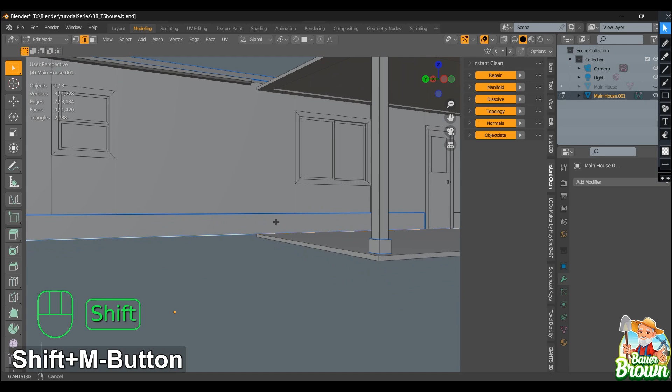Now this foundation, I may not necessarily want to run up into the porch. You can make these decisions as you go. Maybe a vertical seam here would be okay, and I'd have the foundation over here, but regular siding over here. But I think I'm going to leave that as is.

All right, so what do you think? Do you guys maybe have a gist of the unwrapping? I'll show you a little bit more in the next video. But right now, again, we're approaching an hour.

This is a process, right? So not everybody likes unwrapping. It's one of those things that people love to hate, so you may or may not fall into that category. It's tedious, it can be very, very tedious, but it's extremely necessary because everything must get unwrapped.

In the next video, I will show you there are programs or add-ons that you can download and install to assist you in the unwrapping process. But some, not some, but they work better on some projects than they do on other projects. Let's put it that way.

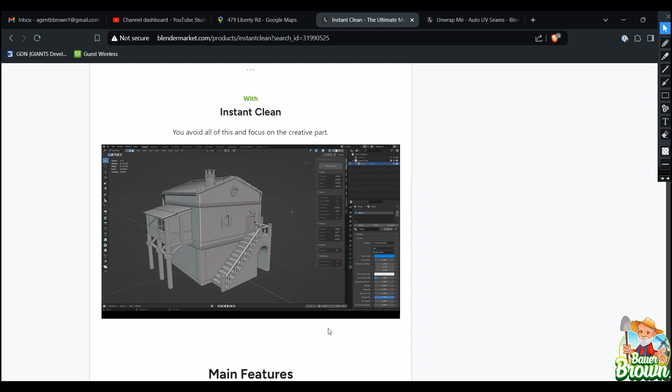Now, I do have programs or add-ons, and I'll show you really quickly what one of them is because we really are out of time. One of them is called Unwrap Me or Auto UV Seams. Basically, it does the unwrapping for you, it marks all your seams.

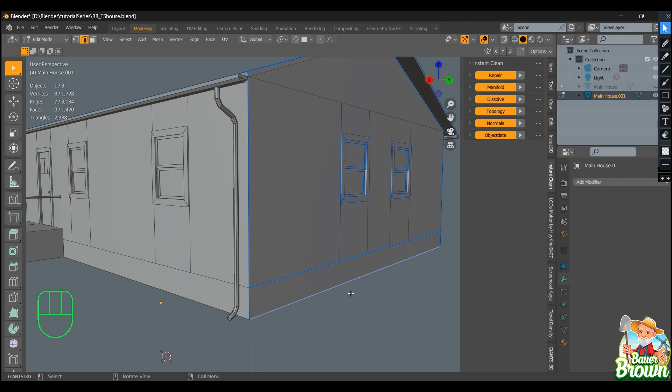Now it's $35 for an individual user. I do own a copy, and I rarely use it. For something like the house that we're working on, a very simple unwrapping process, marking your seams, again it can be tedious, but it's not going to break you. It's not that bad, right?

But when you get into sculpting or something super, super intricate, that has so many different parts on it, that's when you want to get into something like Unwrap Me. So my recommendation right now is to just learn this by hand. It's a skill that's going to come in very, very handy.

So as we near completion on the unwrapping, I'll be able to show you a lot more of what's going on inside of our UV space, on how to fix and ultimately what we want our UV space to look like. I'll show you what that should look like and how to fix things that aren't really looking the way we want them to look.

So in between now and my next video, which hopefully is going to be a lot sooner than this one was—way too much time passed in between this video—go ahead, whatever project you're working on, if you're following along with this house, experiment while you're unwrapping. Make sure your live unwrapping is turned on. Go ahead and experiment and start marking all your seams and see how things are shaping up.

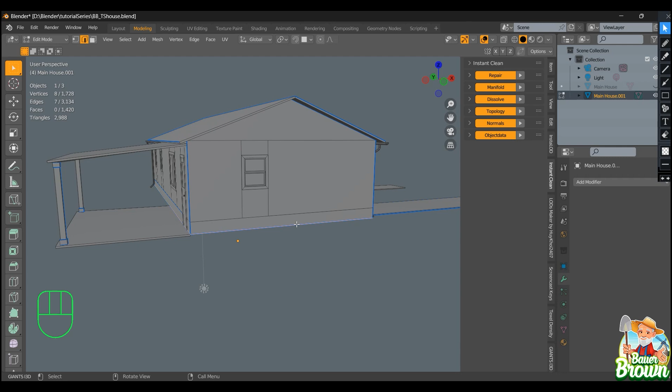Get used to the way things look and feel when you mark them. If you want, keep the UV editing window open, and you can see the changes that are being made in real time as you mark seams. You'll see this mesh finally starting to come together little by little. Your UV space will be looking a lot more organized. But anyhow, point being, just go ahead and keep moving forward with your UV unwrapping.

I may do a little bit of work in between now and my next video, so you don't have to watch me unwrap an entire house. If I have some things to explain, I'll definitely do it when we get there.